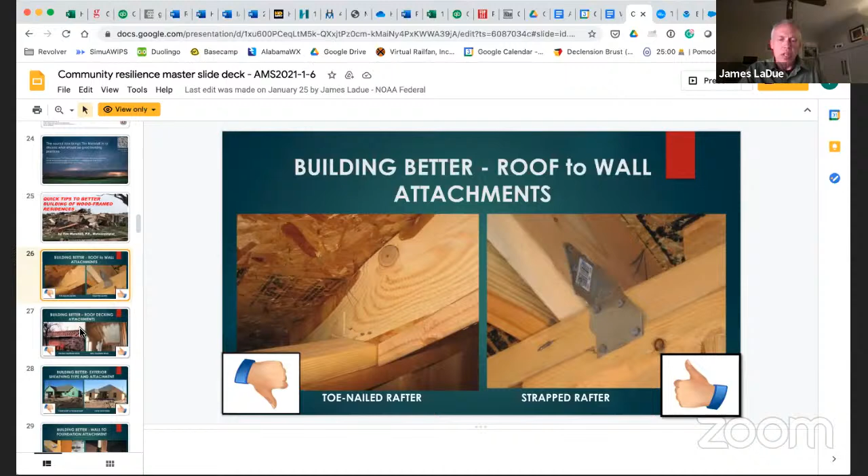It's the clip, and if you notice that clip, a lot of times the top plates will be stacked on top of each other. There'll be 2 of them, and the plate will cross those 2 and then connect the rafter up on top. So one thing you do, if you go around and look at new construction, you look for this kind of thing and make sure that those are properly connected.

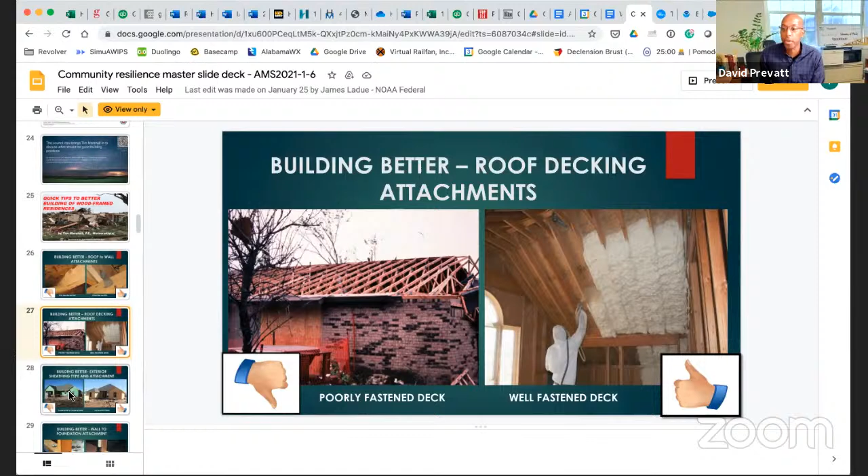I recall doing that, and so that's a 3-in-1 for the price of one. It waterproofs, it gives you some insulation in your attic, as well as that structural adhesive property. When those hot temperatures come rolling through, starting very shortly in Oklahoma, you're going to appreciate you have the insulation capacity too. And Jim, you were talking about sheathing.

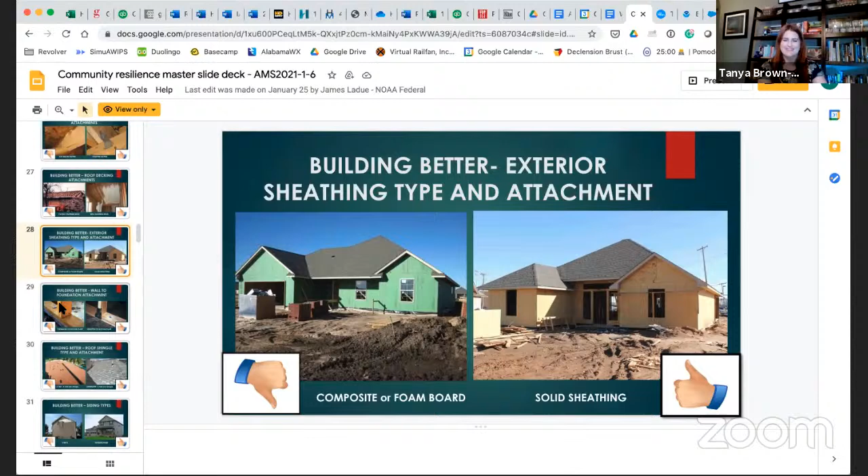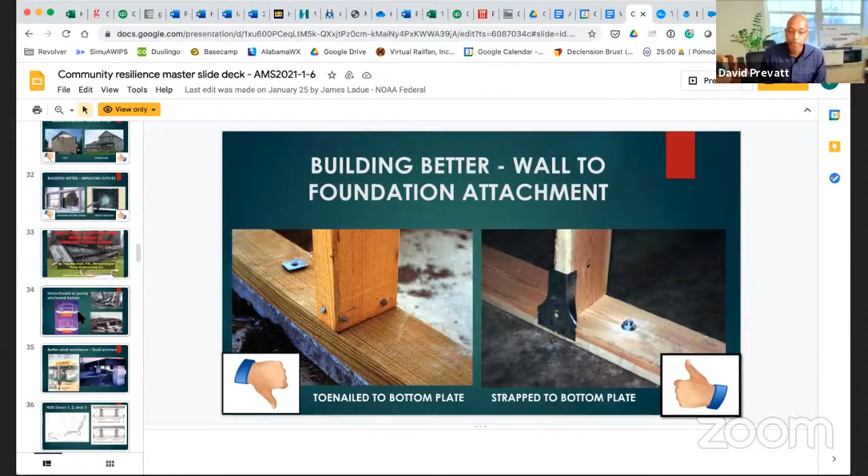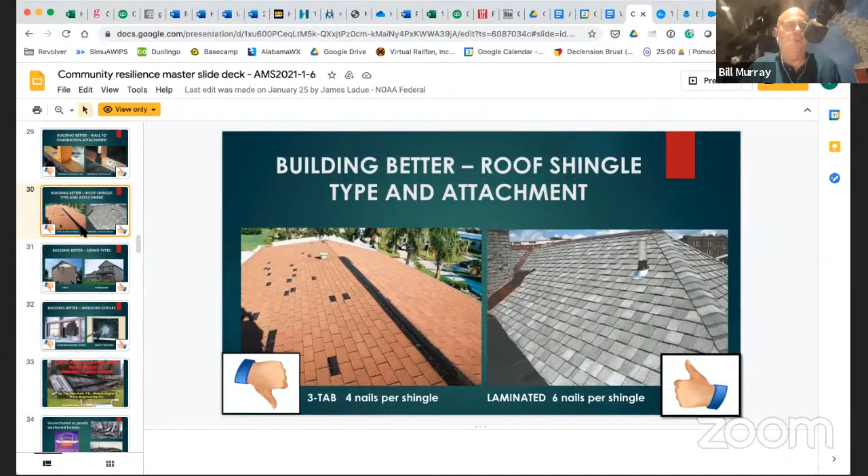But not all class 4 products are rated the same. We have excellent performers down to marginal performers. We used to have some products that performed poorly, and those have actually been removed from the marketplace, which is great. So we're anxious to see how things are going, but you definitely can find different shades of gray of class 4. So little self-promotion there: check out our shingle ratings because you'll want to know what the best options are for you. IBHS.org, the new consumer reports of shingles, for sure.

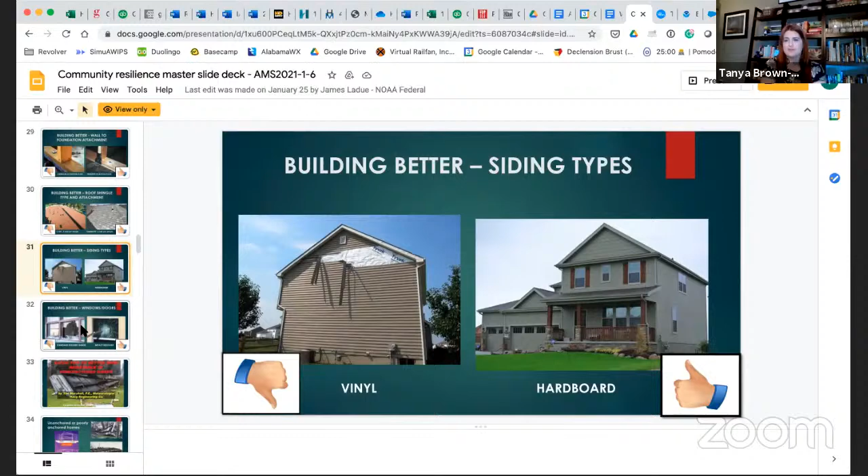Fire performance is better too if you're concerned about wildfires. That's one thing we haven't talked about tonight. You guys are also working on that resiliency and mitigation, aren't you, Tanya? Yes, we're multi-hazard, so wind, hail, fire is really our bread and butter. And it's always nice when you can find products that work for all three. The hardboard, fiber cement kind of boards, those are good options regardless of which peril you're trying to resist, and that is not uncommon to deal with in Oklahoma either.

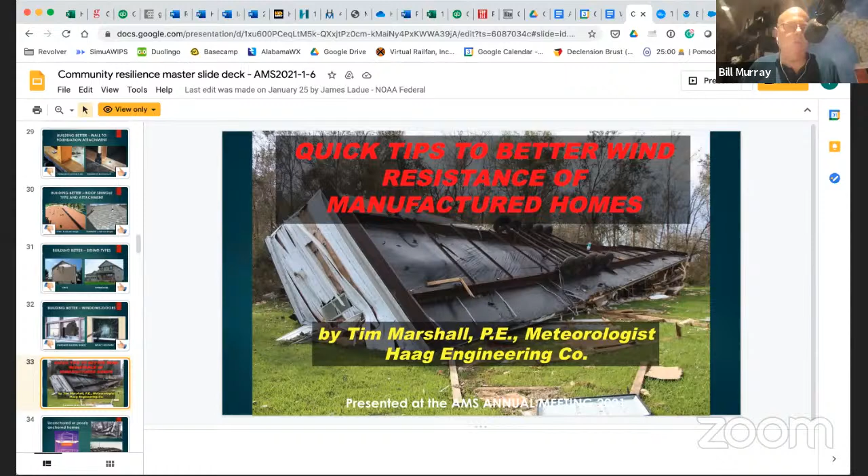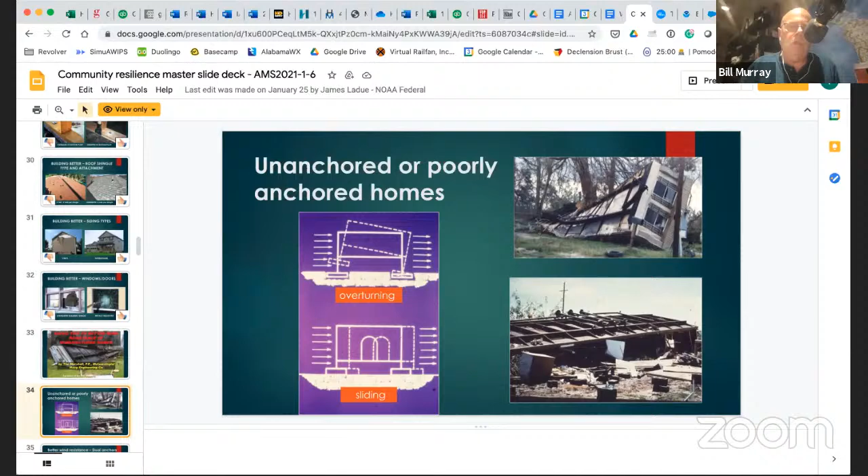We've been talking about site-built homes here predominantly, but Tim also had an excellent set of slides on manufactured homes, because this is another concern of ours: how do we deal with that vulnerable part of the population? We've had a couple of great shows this year talking about what happens with an unanchored or poorly anchored manufactured home, with overturning and sliding. Tim has some examples here of better wind resistance through dual anchoring. Talk about that for a moment, whoever wants to take it.

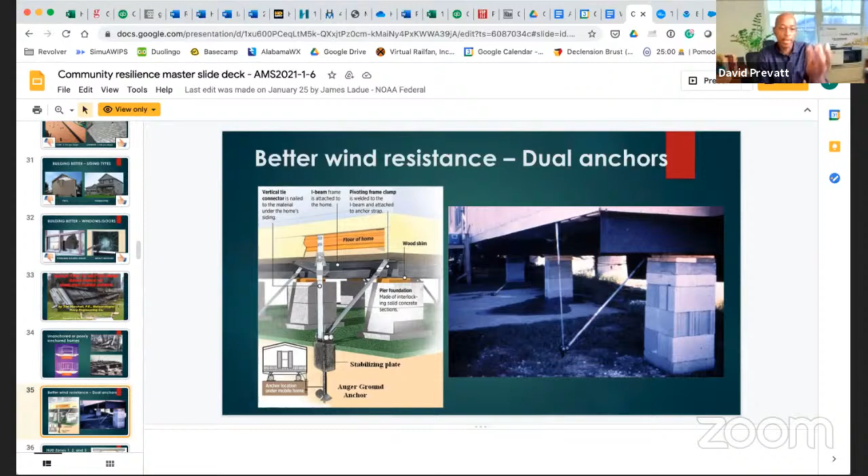This would get my hackles up every time, because again, there was another Dick Marshall in 1978. He identified the problem and he identified solutions, and we chose not to do anything about it. I think that ultimately we have to understand that even the dual anchors we see here are fraught with places where weaknesses can occur over time, right? As the soil moves, it sinks or it comes up or something like that. You're always going to have some change in the stiffness requirements there, and once you have that, you're going to find yourself losing a lot of the strength on these connectors.

I think it is high time that we consider addressing mobile homes completely in a much more rational way. It's insufficient for us as a society to say, just because this is an inexpensive house, you should live here. I don't believe that.

So it's always amazing to me, Kim, that when we have a show like this, I don't know how in the world we're going to even fill 75 minutes. And then I realized that we could fill 150 minutes.

I want to get to the real point of tonight for a minute. David, you feel very strongly that the Weather Enterprise has a megaphone that maybe architects and engineers may not possess. Talk about how important it is that we take that megaphone and do something with it, and what is it that we should do?

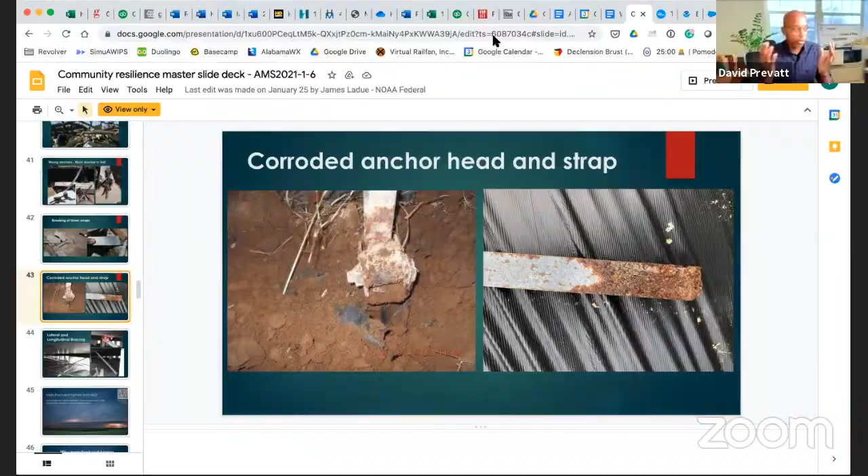Well, you need to train me how to speak. I need to be able to speak to people just directly, as we are doing here, in a normal conversational way, without telling them about the abracadabras. They don't need it. We have solved the problem. You need to be convinced that the problem is something that you and your community and your city needs. That's it. It's a very basic message these days of application of things that already exist.

Now, Bill, you said something way back at the start of the 75 minutes, that people are more convinced by someone, their neighbors or their friends, than by me. They absolutely—I think if you speak to Kevin, you'd find that statistically, I'm a stranger, I'm an engineer, but if your neighbor, if your friend is doing something, you're more likely to adopt it. And so this peer-to-peer conversation is what we are trying to get started.

As one of the most trustworthy professions in this country, I'm speaking to all of you weather forecasters here, you're a friend. They see you as a friend. They interact with you on a day-to-day basis. Oh yeah, they might say, oh no, he was wrong, she was wrong today, and so on. But when it comes down to the real stuff, they are going to listen. Many people are going to listen, and then they're going to talk about it. And it is the conversations that we want to get established.